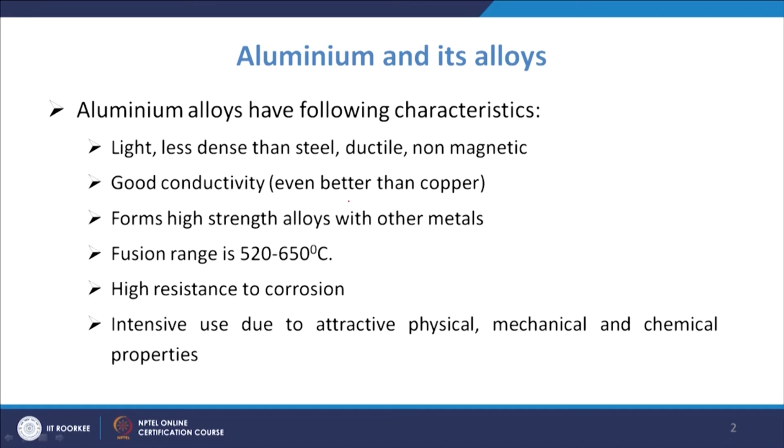Then the fusion range is basically between 520 to 650 degrees centigrade, and the melting point is close to 660 to 670 degrees centigrade. Now, because of all these properties, you have intensive use of materials like aluminum.

So, they alloy with many elements like copper, chromium, nickel, even iron, and zinc, manganese, silicon. So, with them they are making a variety of materials.

And many a times when you talk about the strength of these alloys made by combining with other elements, they are approximately 4 times stronger than the same weight of mild steel or iron based alloys. So that is the advantage of such alloys developed from aluminum with different alloying elements.

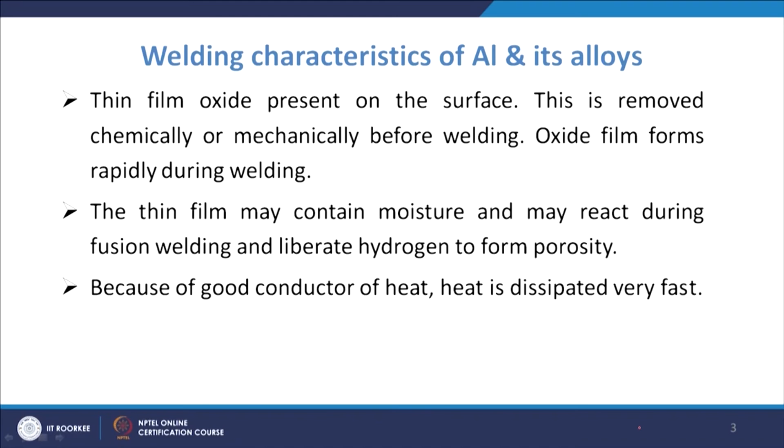So, normally you go for different means to remove that layer, and for that we are taking methods like brushing and scrubbing before the welding. We also take suitable flux during the welding or during the brazing operations. Suitable electrodes should be used. Then normally we try to use DCRP, that is, the electrode is connected to the positive terminal, and that is found to be effective for MIG welding, and AC is used for TIG welding.

So, that is normally the practice which is followed in the case of aluminum. If you take DCRP and use it in TIG welding, the tungsten electrode will be very much heated. When you connect to the positive terminal, 2/3 of the heat is generated at the positive terminal. So, in that case 2/3 of the heat is generated at the electrode and it gets overheated, and there is no adequate melting of the metal.

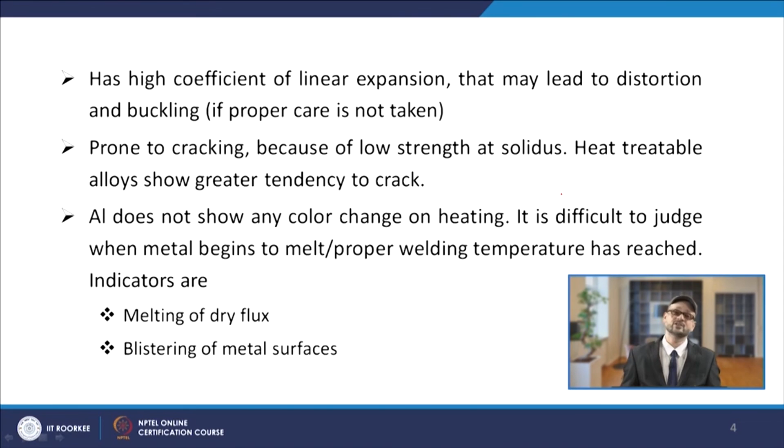So, that is there. Another challenge with aluminum is that it does not show any color change on heating. Many times when you are doing welding there is a change in color. In the case of iron, because of the change in color you can get a feel for the temperature, whereas in aluminum that is not the case.

Because of that, many times it becomes difficult to judge when the metal is beginning to melt, or when the proper welding temperature has been reached. So for that you have two indicators for the welders: the melting of the dry flux and the blistering of the metal surface. These two indicate that the proper welding temperature has been reached, and then you can accordingly take immediate measures.

Then, if you look at the different processes which can be used for welding aluminum and its alloys, these are oxy gas welding, metallic arc welding, resistance welding, carbon arc welding, brazing, solid state welding, MIG welding, TIG welding, and atomic hydrogen welding. All these processes can be used.

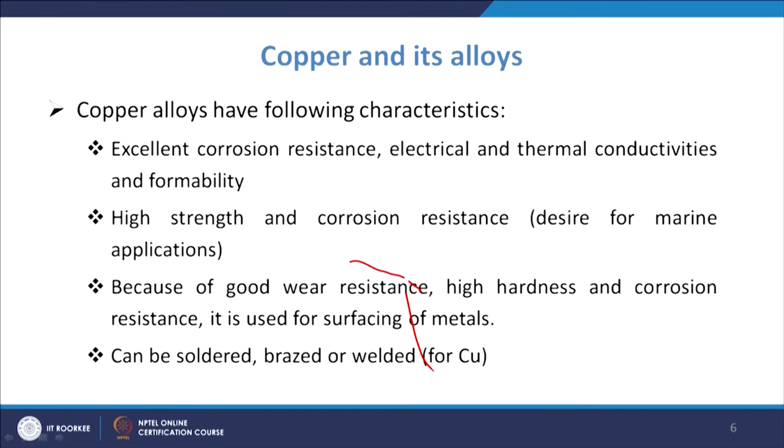Since it has very good wear resistance, high hardness and corrosion resistance, it is also used for surfacing of metals. They can be soldered or brazed. They can be easily polished and plated because of very high conductivity. So all these properties are there for copper.

Now, if we talk about the welding aspects of copper, copper has very high thermal conductivity, and that necessitates very high heat input into the parent metal. As we studied for aluminum also, a very large thermal conductivity increases the tendency of heat to flow very readily. So either you preheat, or you give very high heat input to the parent metal.

This is to counteract that effect, because if the heat is dissipated fast, that may lead to undesirable results. So we can have high heat input, or we can do preheating. Then you have a large value of thermal expansion coefficient, which again will induce residual stresses.

So normally it is advisable to go for slow welding speed or to cover the welding joint with insulating material. That is the advice in the case of copper, because the thermal expansion coefficient is high, so there will be more warpage because of the stresses which are generated.

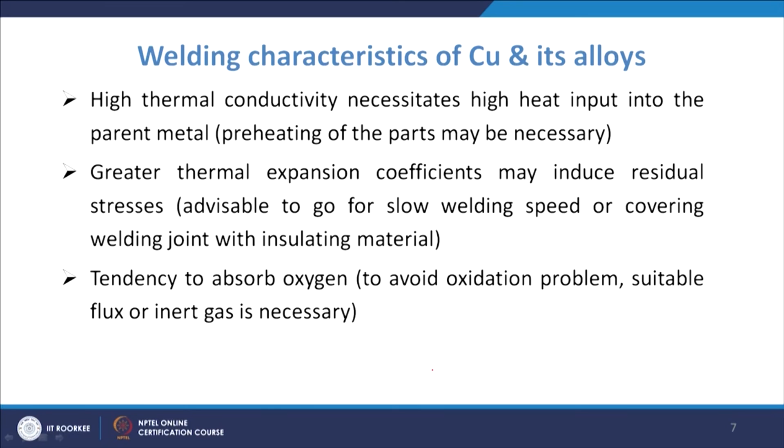Further, it has the tendency to absorb oxygen. To avoid that problem, we normally use suitable flux or even inert gases. That is the way you can control the oxidation problem related to the welding of copper.

Apart from that, if you look at other properties of copper, molten copper is considered to be more fluid compared to molten steel. So you can use more welding speed as compared to steel, because it has more tendency to be in the fluid state compared to steel.

Then one more property is that it has very low relative strength above about 482 degrees centigrade, so cracking may develop in copper because of its low strength at close to 500 degrees centigrade or above.

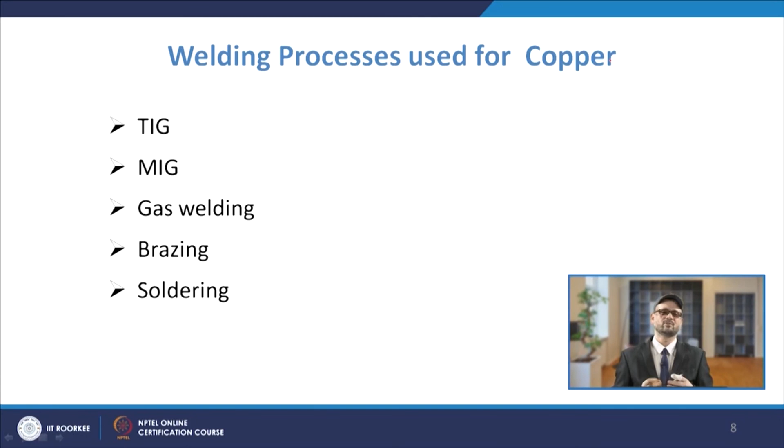So, the chances of cracking are there in those cases. If you talk about the different welding processes which can be used for copper, they are TIG, MIG, gas welding, brazing, and soldering. These are the processes which are used for copper welding.

Next, another important material whose alloys are very much used is magnesium alloys. Magnesium alloys have the following characteristics: it is also a silvery white material, and it has a very high strength to weight ratio. Its specific gravity is even smaller; it is even lighter than aluminum. It is only 1.74. So, that is how you can have the idea of how light it is.

Aluminum is about 1.5 times, like it has something close to 2.6 or so. If you look at other materials, it is even larger, so copper is about 5 times, or iron is about 4 times or so. So, it has very high strength to weight ratio and very good fatigue strength. Its melting point is 650 degrees centigrade. Then it has a very good fatigue strength.

Because of their strength to weight ratio, they are used in the aviation or automobile industries, where you require saving in weight, and it has a very good fatigue strength. That is one very good quality of these materials. They have very good dimensional stability in service, and also very good damping capacity. They have very high thermal conductivity, and also good electrical conductivity.

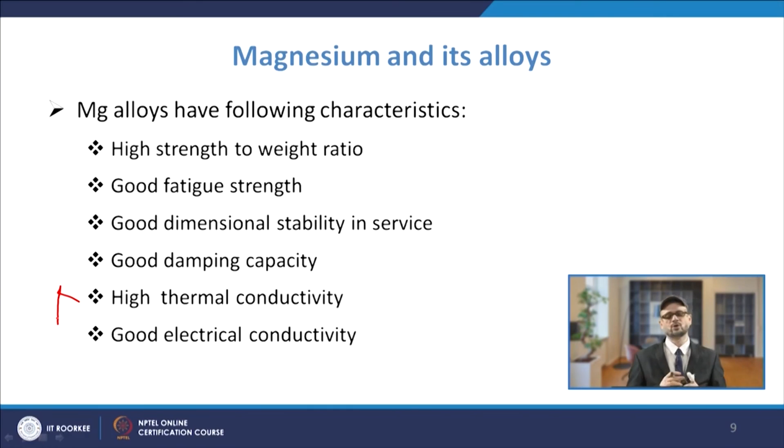These make them used in many applications, like airframes, engines, marine applications, missiles, engine transmission pumps, textile machines and printing equipment. At many places we find the application of these magnesium alloys.

If we discuss the welding characteristics of magnesium alloys, most magnesium alloys are readily weldable, but they can be affected by oxidation, because oxidation of magnesium and its alloys is very rapid. When it is heated to the melting point in air, it readily gets oxidized. There may be burning, there may be fumes. So, it is considered very challenging. You normally use an inert atmosphere and suitable fluxes in those cases.

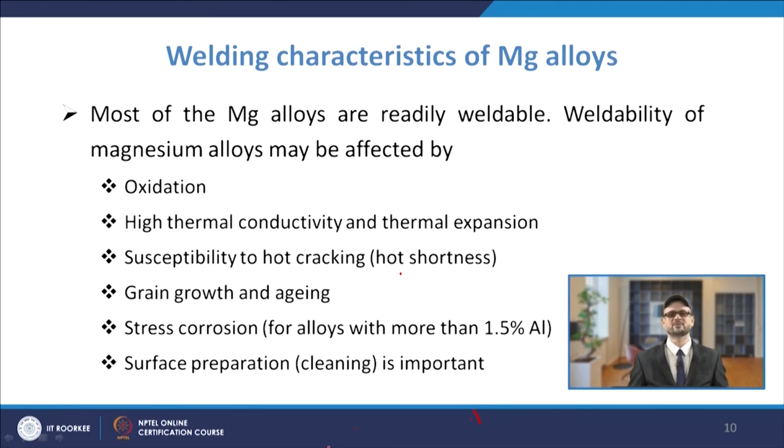Apart from that, grain growth and aging are also observed in such materials. You have the probability of stress corrosion when you alloy it with more than 1.5% of aluminum. And then you have surface preparation or cleaning. When you do the welding, surface preparation or cleaning is adopted. That is considered a good welding practice in the case of magnesium.

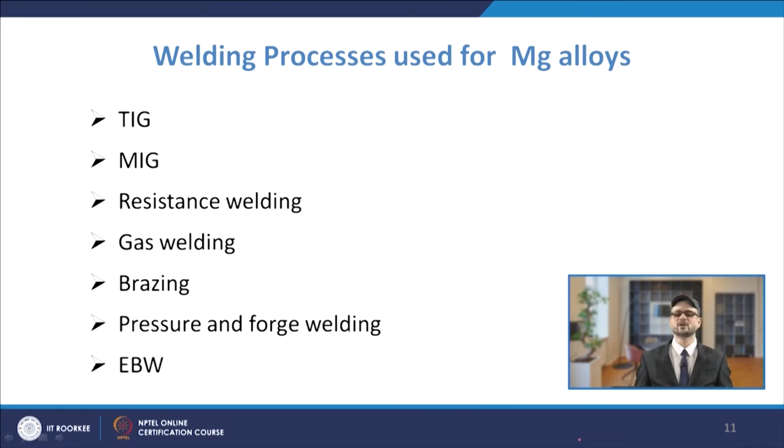The processes used for magnesium alloys are TIG, MIG, resistance welding, gas welding, brazing, pressure and forge welding, and electron beam welding. These are the normally used welding processes for magnesium alloys. So, we have got some information about the weldability of aluminum, copper and magnesium alloys. We can get information on other materials by reading the books.